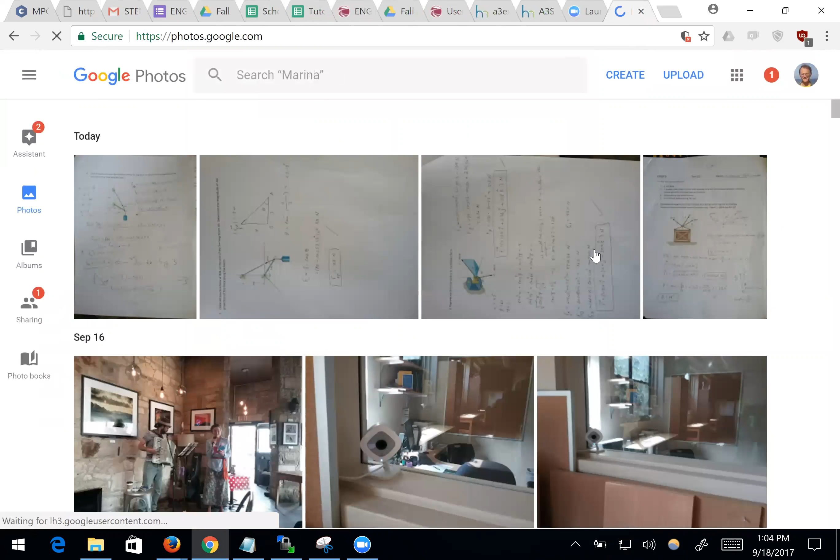So the test worked out pretty well for most people. I didn't actually make solutions yet, but I took photos of a few people's tests, so you can see them. I will post these later.

Does anybody want to go over anything in particular on the test? Yeah, on the test. Pardon me? Marking 3 points off for like a side note. Yeah, if you're doing something and you think it's wrong later on, just scratch it out.

Because when I see really crazy stuff, I want to mark that off. I just decided to do it this time because the test was actually fairly straightforward, and so I wanted to see how clear you were. When I'm looking at your work, especially if you didn't box what was the right answer, if you just had a bunch of random stuff on there and the right answer embedded in there somewhere, it's not up to me to find or determine which one's the right answer. When I see some crazy stuff there, I want to just mark it off because it looks really bad.

So I did see that you had the right answer, which was good, so I only marked off a few points for people. Some people did things like computed a force which was like 3 meters times g. I'm like, what? So I scratched it off and marked off points. You can't do that, right? You've done this, you know how forces work. It's not meters times g, right? That's not a force. So you should train yourself to think correctly and look for those errors.

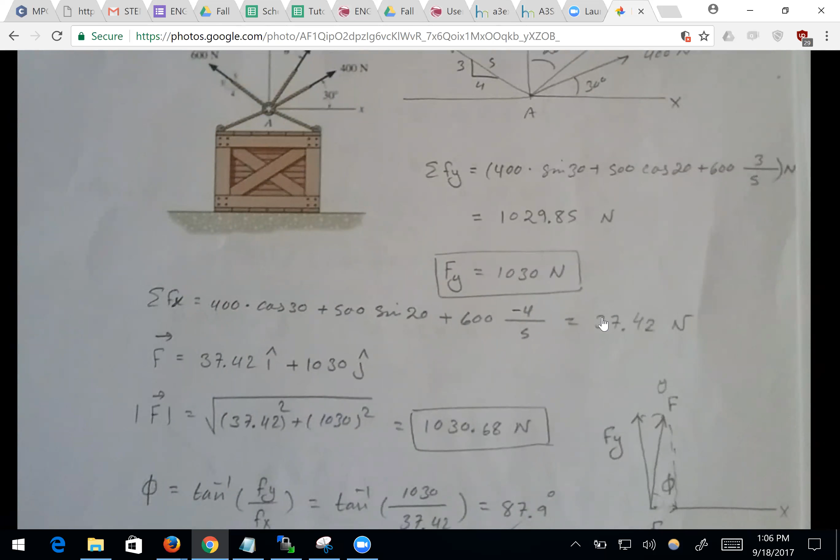Yeah, sure, so we can go over the second one. No, well, the last one I think is the most important. I was going to talk about that, but I'm happy to cover anything. If there's anything on these that anybody had questions about, let me know.

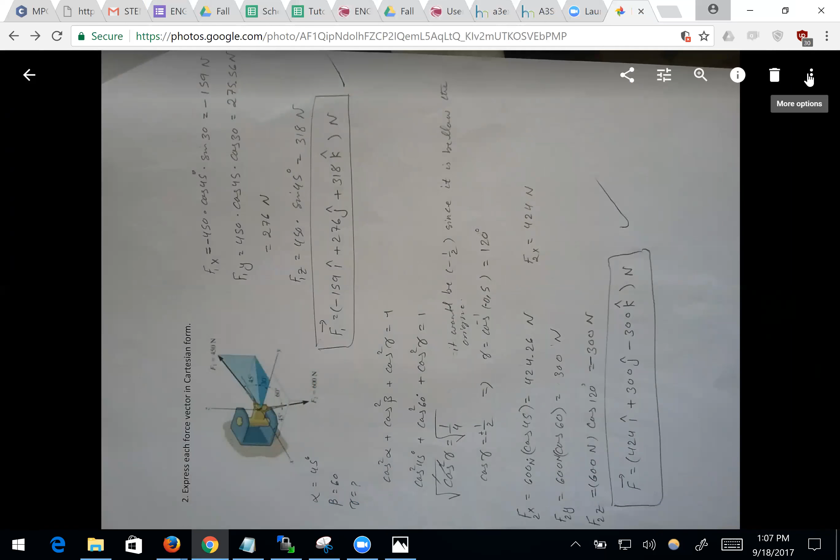And shoot, can I turn this? I don't know if I can. So turn your head sideways. The second one. What about the second one? Actually, should I download it? I could just download it, probably be better. Is there a rotate button? Even better. Perfect. It said rotate was Control R, but let's see. Try that again. Oh, Shift R.

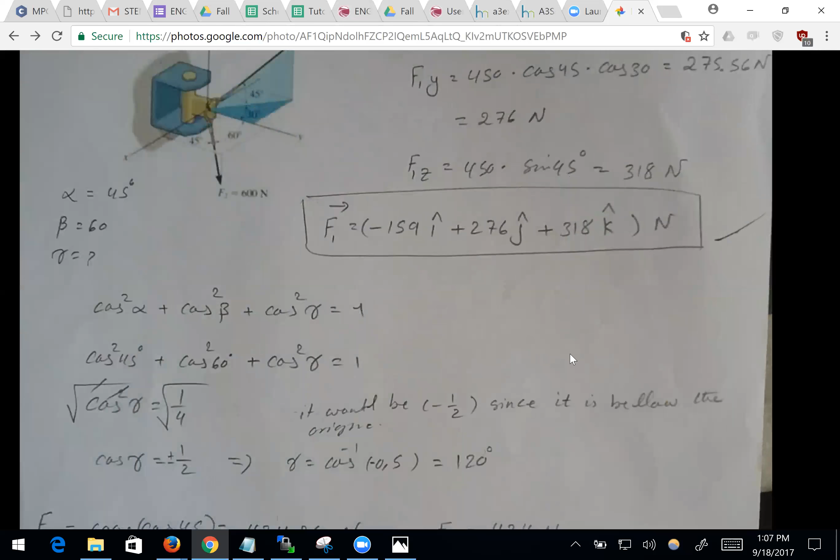Okay, so what are you doing on this one? So F1, right? That's a projection angle problem, right? So you got to figure out what's F prime, which is the base of that vertical triangle, right? That's 450 times the cosine of 45, right? Now you take that, and to find the x component...

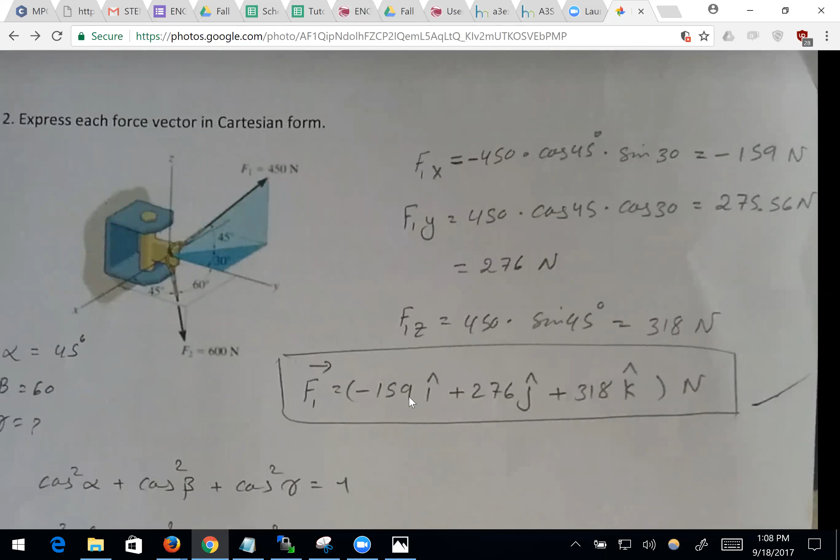I mean, I could still download it so we can mark it up if you want. Does anybody want to see me mark it up? The x component, which is... I wish I had time to actually get this together. So let me try downloading. Or even better, I could do a snipping tool. I think that would be easier.

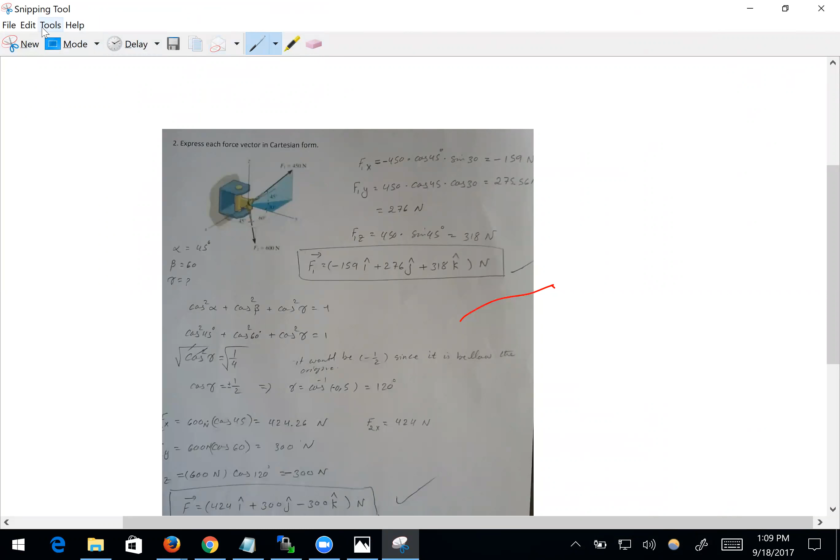So snipping tool. How do I make this thing bigger? All right, all these amazing tools, and they just don't do what you want them to do.

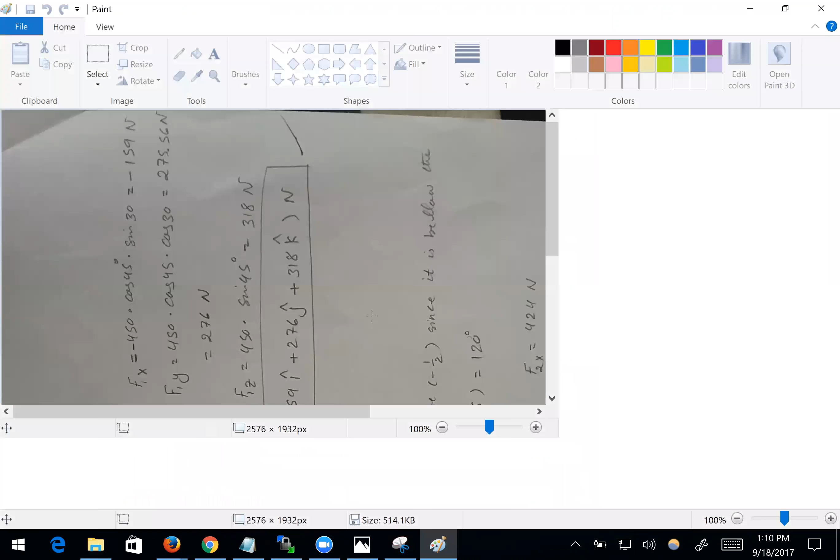Okay, let's do fine, sideways, open with... Paint, trusty paint. Okay, now I can mark this up.

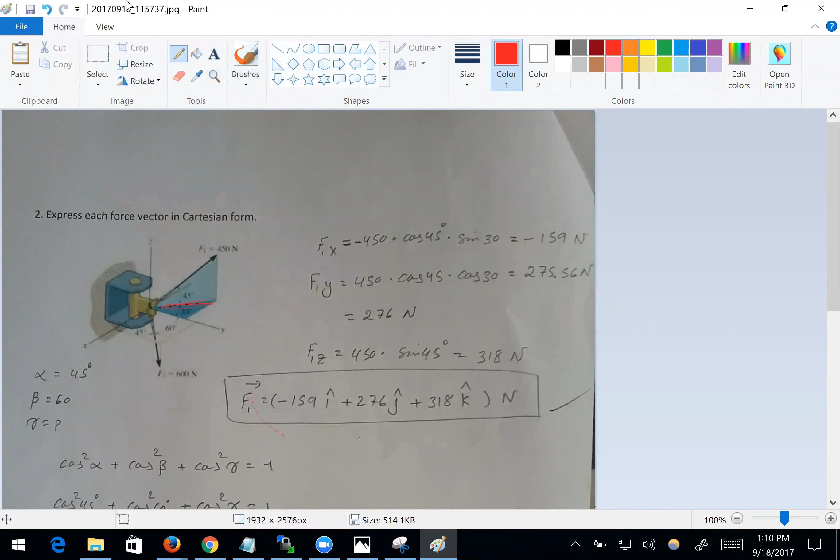As I was saying, the base of the triangle is that, and that has a length of 450 times the cosine of 45.

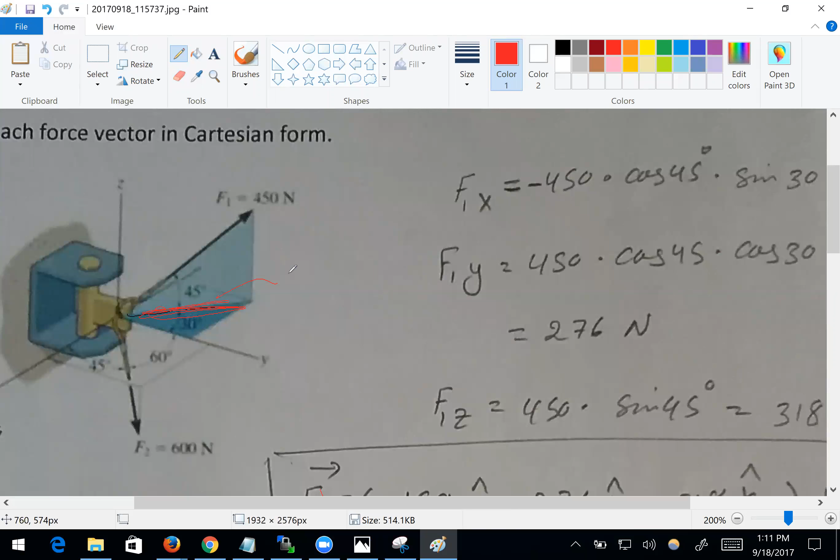Okay, and then what you do is you take that distance, and that's the hypotenuse of the flat triangle that's horizontal. You're going to use 450 cosine of 45, and use that as the hypotenuse of another triangle.

So to get the x component, this is going to be this times sine of 30, and it's negative. So that's why the fx is that, and fy is that. Was there a particular part, Isaac, that you wanted to go over on this one?

Not sure if you find x or find y first. If you want to bring it up here, I'll explain what my writing meant. It looks like I did the first half. Yeah, you got the first half right. You got F1 right? Yeah. Okay.

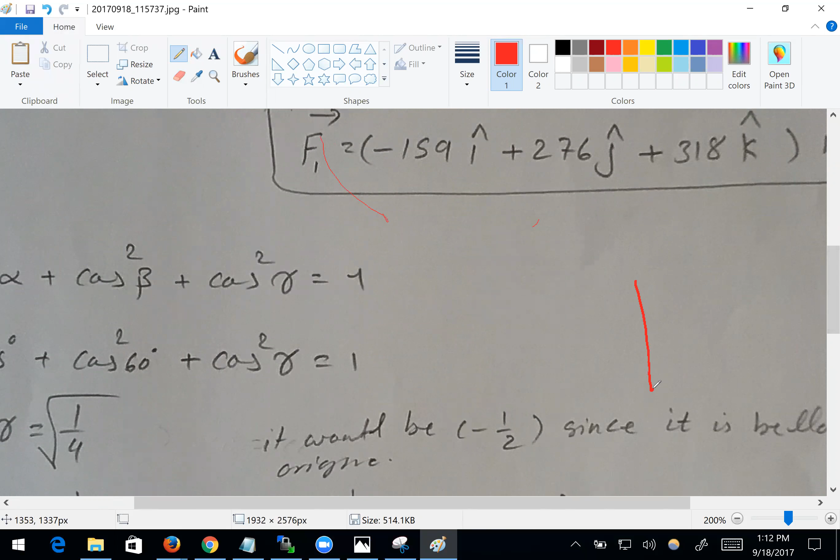And then for F2, no, find gamma. You didn't find gamma. Remember, gamma is when you have the other angle or the other vector. This is a direction angle problem, right? And for direction angles, you need alpha, beta, and gamma.

What's gamma? Angle to the z-axis, right? Gamma is this angle here. It's a little hard to see on this vector, but gamma would be the angle from the z-axis to the vector, and you have to find that in order to get this thing written properly. Remember, we did that.

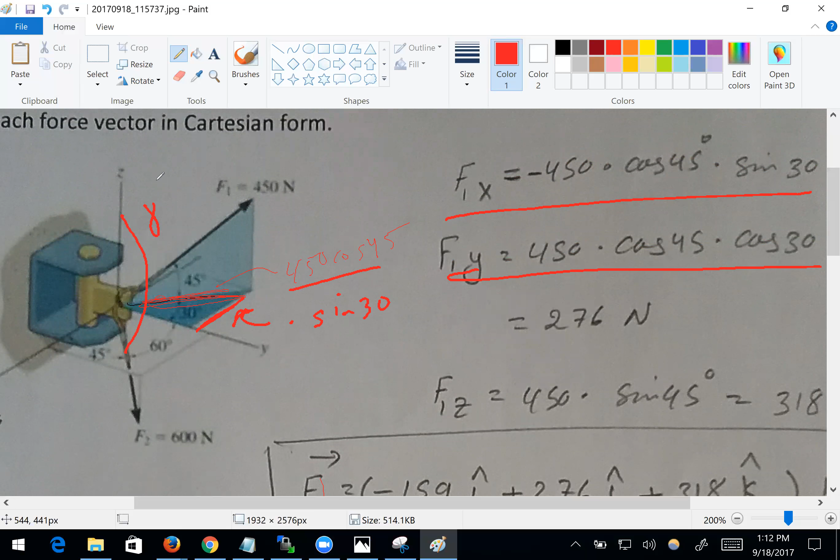So to find gamma, we were given alpha and beta. Some people said gamma is just 180 minus alpha minus beta. That's not right. No, good, glad you didn't write that.

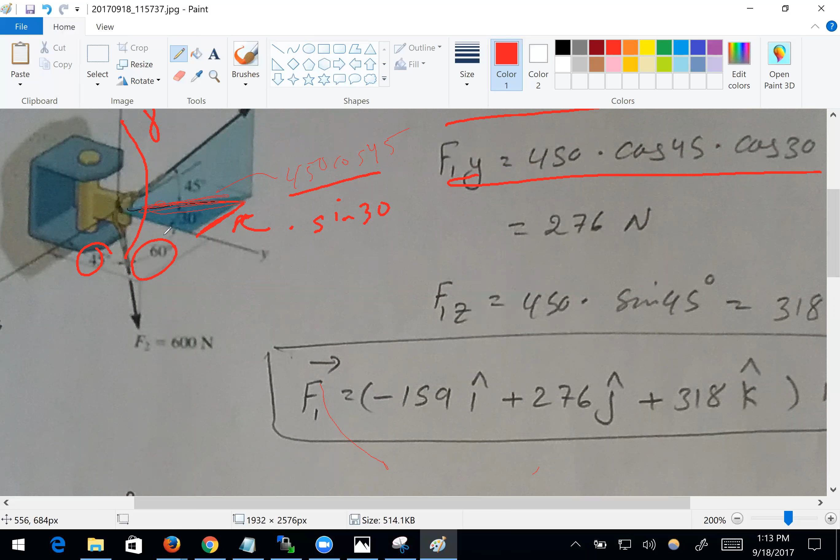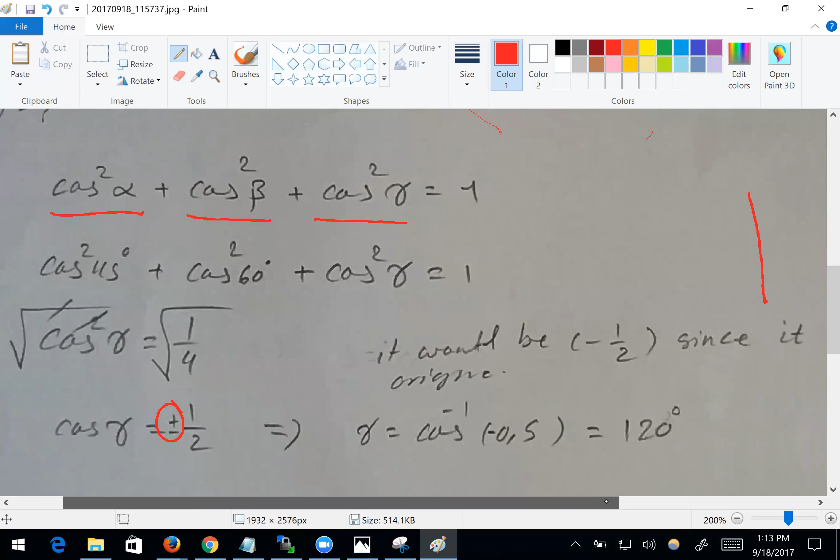Cosine squared alpha plus cosine squared beta plus cosine squared gamma equals 1. You solve that for gamma. That's how you find gamma. And there's two possible values for gamma, it could either be 60 or 120 degrees. In this case, since the arrow is clearly below the origin, pointing below the xy plane, gamma has to be 120 degrees so that the cosine is negative.

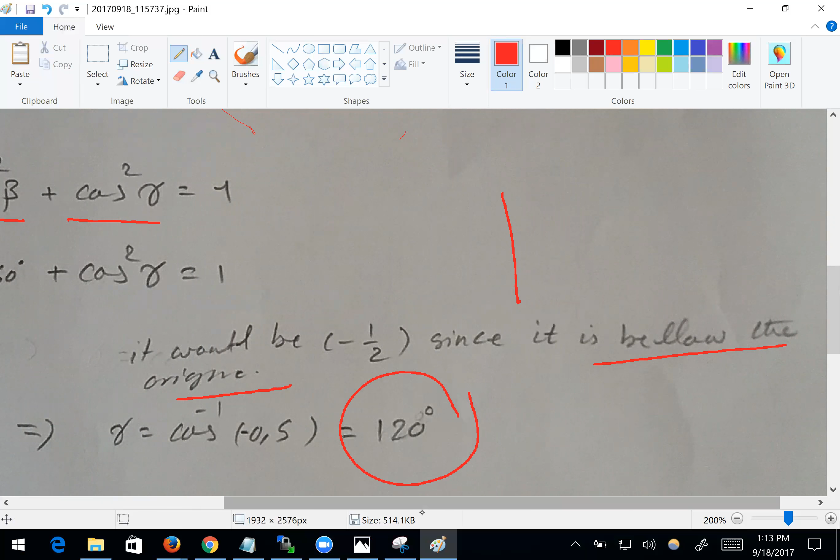Then once you find gamma, it's just plugging that into the third equation, 600 cosine of 120. This is gamma right there, this is beta, and this is alpha.

Question? I'm not sure each question. Each question was like 30, 30, 40, something like that. Basically it all adds up to 100, and I'm just sort of using some. It's not - I mean what I'm looking for is the kind of error that you're making. If it's a serious conceptual error, or if you just forgot to do a big part of it, like gamma is a pretty big chunk of points. Yeah, if it's a sign error, it could be 2 or 3 points depending on.

Yeah, because there's only 3 questions. Yeah. Yeah, there's only 3 questions. So, yeah.

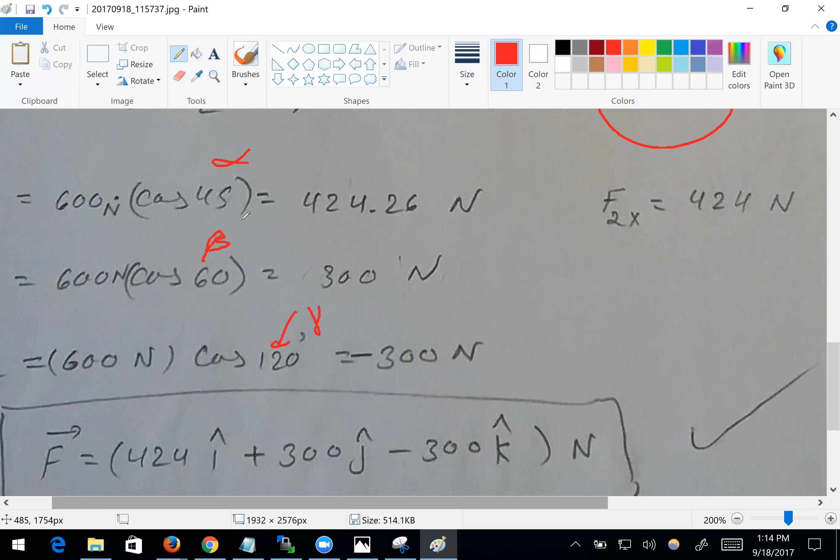Any other questions on that problem? Then the last one had an easy way of doing it. I won't even probably download this one. You just rotate it. Wait, how do we rotate again?

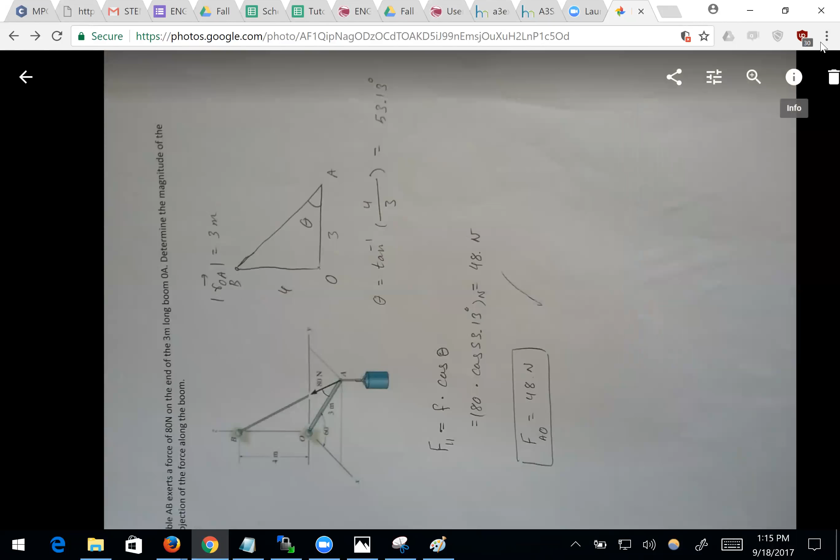Where was that? It's not under more tools. What was that rotating thing? All right, Shift R, try that. Thank you.

Okay, so this one, normally, I've given this kind of test before, and this third problem involves you actually having to use the dot product to find the answer. A lot of people just run aground there because they haven't figured that out clearly enough to be able to do that on a test.

This problem, in a section on dot product, is asking you for the projection of the force along the boom. But if you're clever enough and recognize this is a 3, 4, 5 triangle, you don't actually have to do the dot product to find the answer. You could just realize a 3, 4, 5 triangle means that theta is just 53.13 degrees. So the parallel component part that's going along AO is the projection of the 80 Newton onto the XY plane with a 53-degree angle there to the XY plane. So the cosine of that is 0.6, times 80 is 48 Newtons.

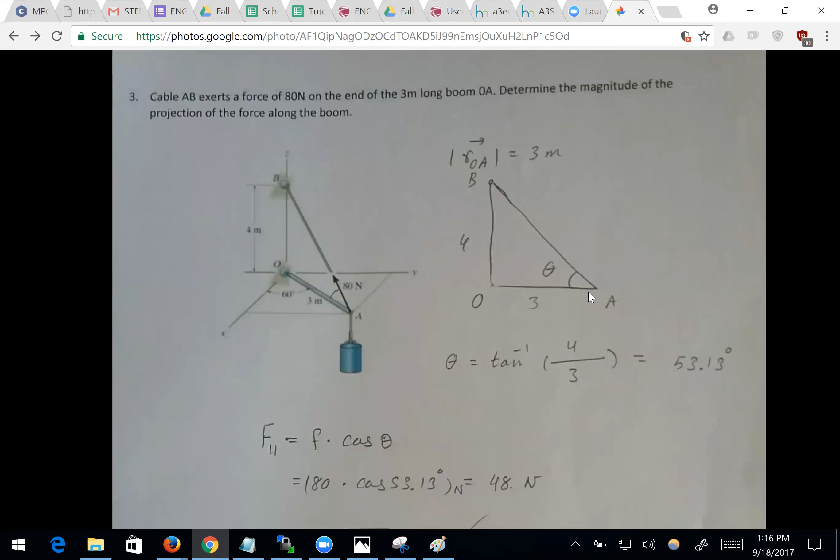So I accepted that, and that was an easy out for people who could see that. What I was hoping some people would do is the more general way, which can work even when you can't see that there's a 3, 4, 5 triangle, which in general you can't. So for that you have to use the dot product.

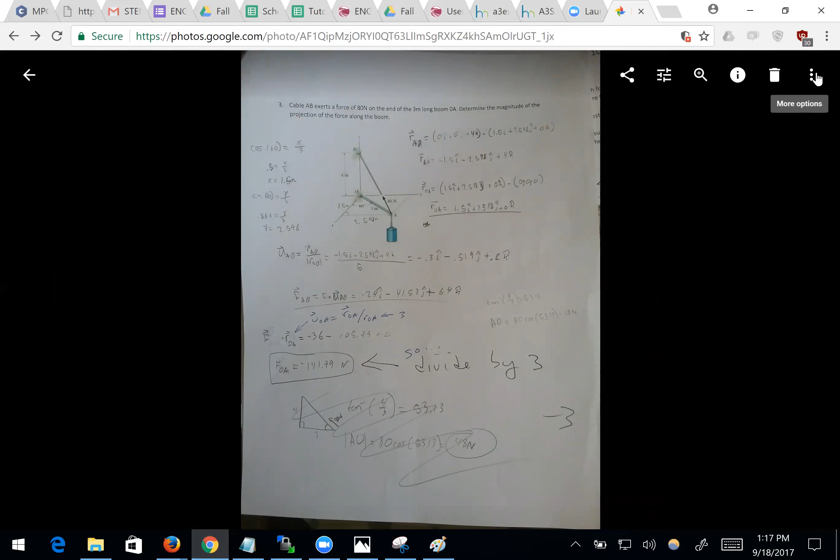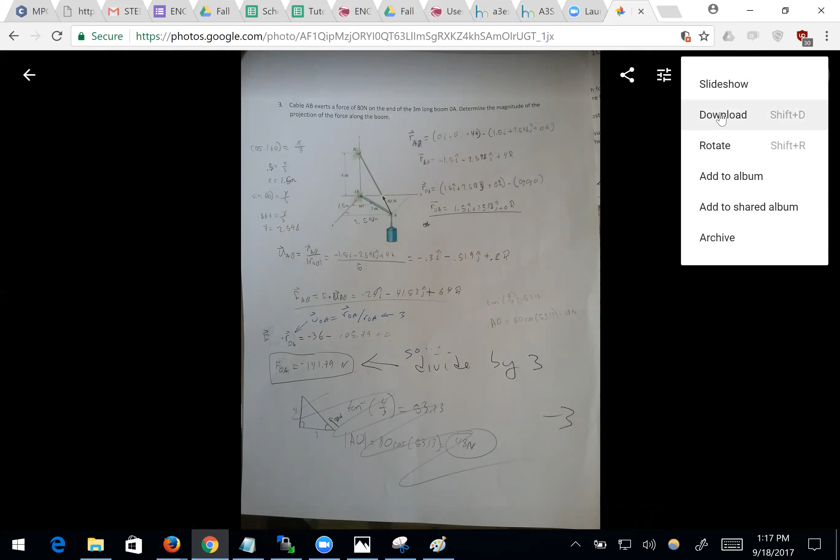So for the dot product solution, we have Jose's. Jose got it almost right, and actually a lot of people started using the dot product and then worked their way to figuring out what theta was just by the Pythagorean theorem or something, and then they bailed at that point. They didn't actually follow the dot product all the way through. Jose was one who actually did it all the way, but he forgot a little bit - he made a small error, and I can show you what that is real fast.

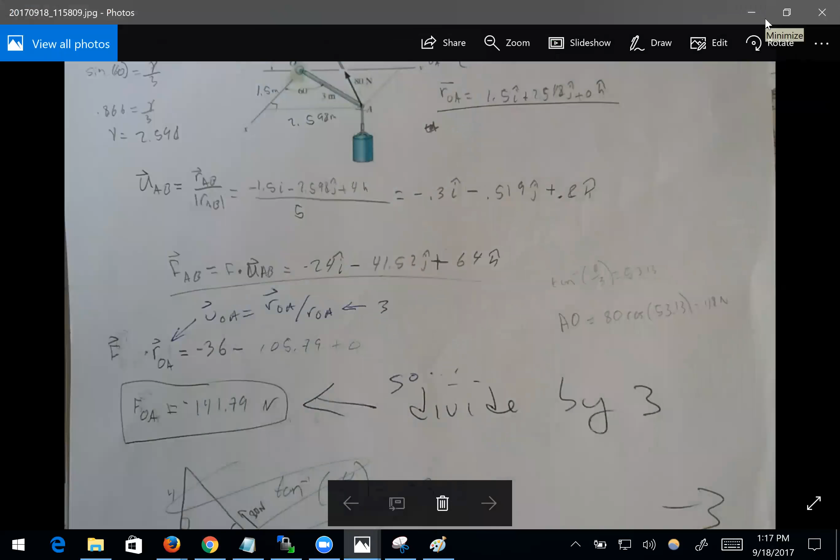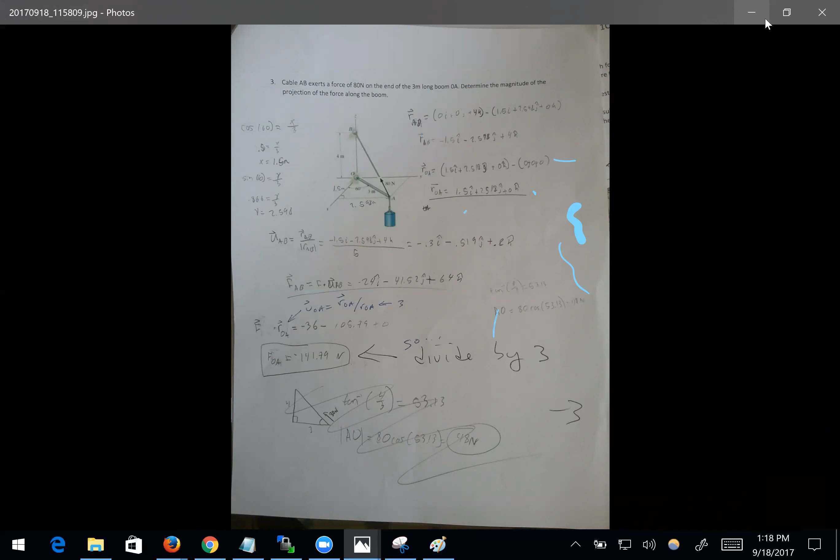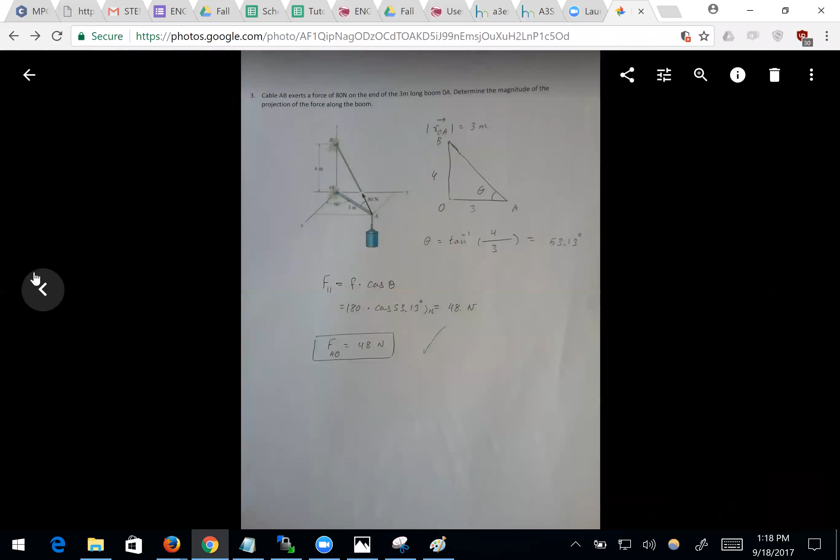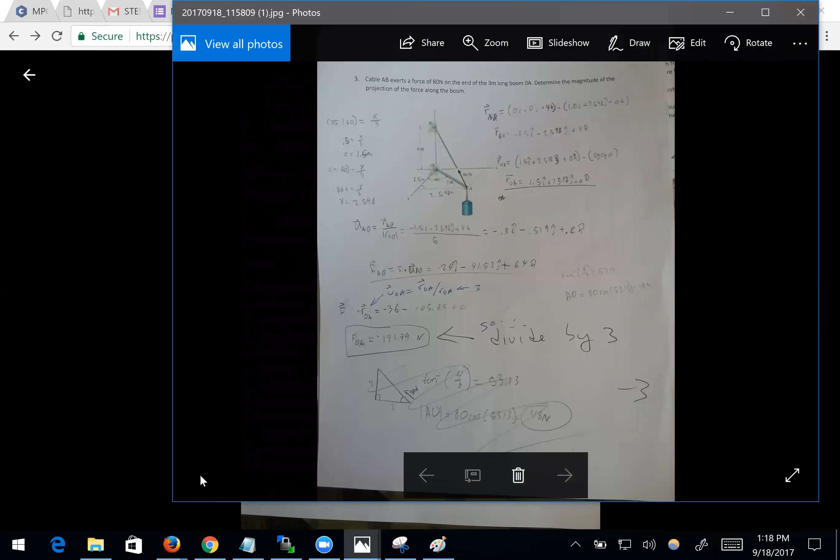Can I draw this thing? Oh, that's even better, I can blow it up. And draw on it, then I'm happy. That's what I draw on. Size, there we go. Okay. So now I want to - no, I don't like this after all. So it downloaded it, but is that it? It's not showing up here.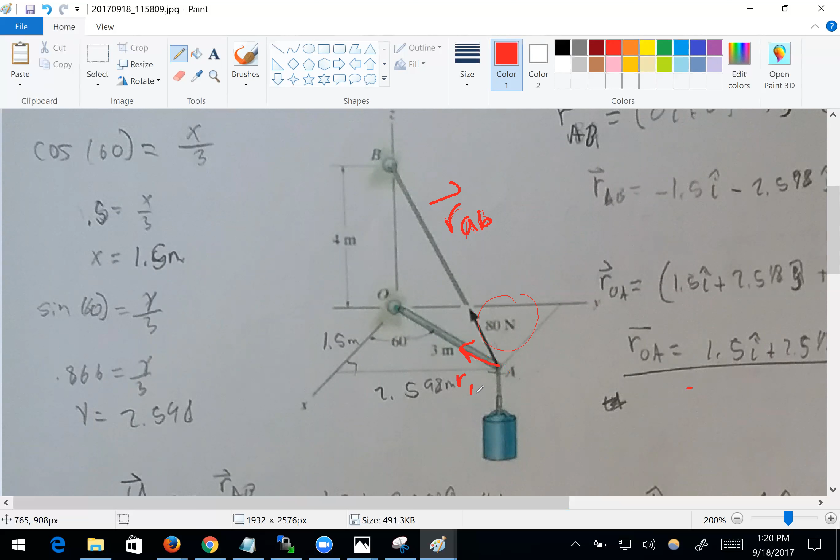You know that this is 80 newtons, so you've got to make a position vector to find the force. So you find RAB, which is this position vector, and you find UAB, which is a unit vector along that direction. You find RAO, which is this position vector, and you find the UAO.

And the formula for the dot product says that F parallel, and here's where Jose kind of worked it out here. The F parallel, or FOA, is going to equal the force vector dotted with—that's the dot—with not ROA, but UOA. Okay? Because remember the definition of the dot product is...

FOA dotted with UOA—you should remember this. This should have been on your formula sheet. It's what? This is F parallel to OA is FOA dotted with UOA, which is the magnitude of F—sorry, it's not FOA, it's FAB. The magnitude of FAB, which is the force going up that cable, times the magnitude of UOA.

What's the magnitude of UOA? What does U stand for? Unit vector. What's the magnitude of a unit vector? This is an easy answer. What's the magnitude of a unit vector?

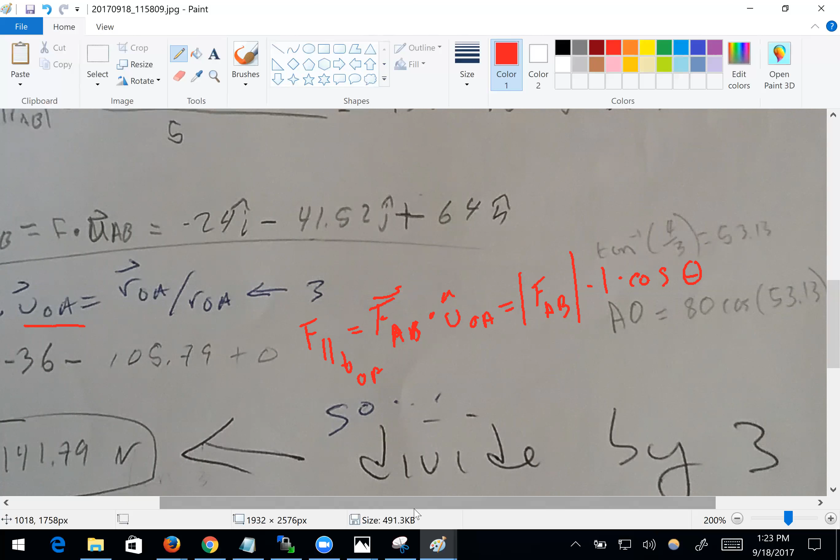Right here, you got FAB. So you got UAB there. You got ROA, which would have allowed him to calculate UOA. The magnitude of ROA is 3, so you just got to divide that by 3 to get UOA.

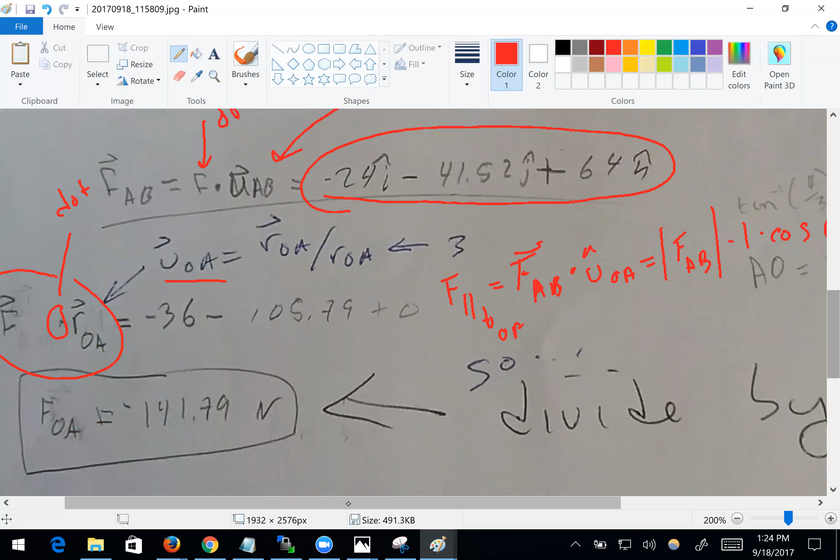Here is his FAB, which is 80 times UAB times that, which gives you the Cartesian form of the force vector. And then you have the parallel component, which is dotting that with UOA, not ROA. In other words, if you just divide it by 3, you'd get the right answer. So he was very close.

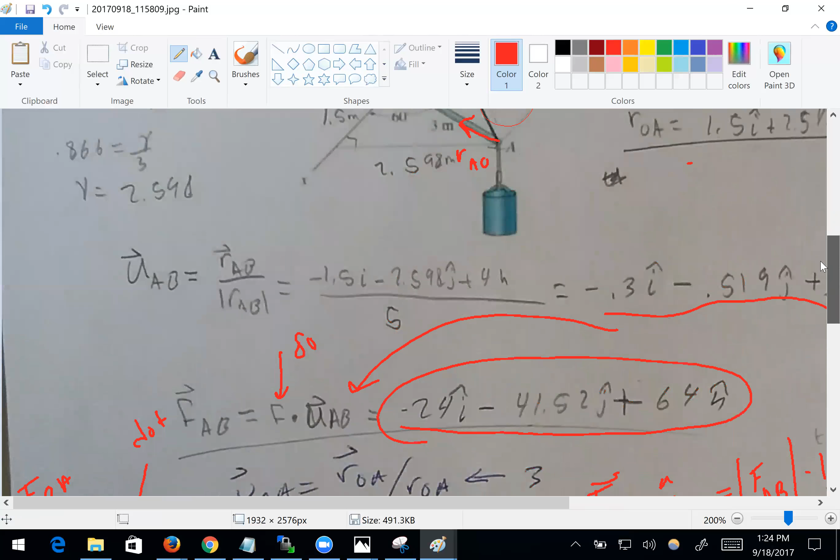Correct answer being, what was it, 48 or something? 48. Good. And actually, he had the right answer. Oh, he did it the easy way too, and then he scratched it out.

He took a gamble that the other way was right. I want you to decide - if you come up with 2 ways of finding the answer, you have to tell me which one you think is right. So for the not-easy method, you chose the dot product first.

Theta is still going to be the tangent inverse of 4/3. It's the same theta. The arctangent of 4/3 is theta.

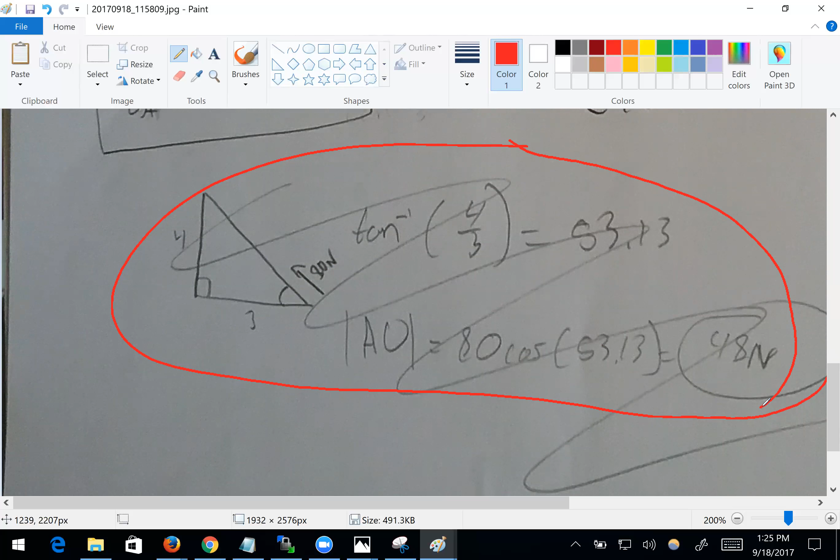It's the angle between the two vectors - it's this angle right here. Or, it could be defined depending on how you define OA. If you define it as AO, like pointing towards the origin, it's that. If you define it as going that way, it's this angle right here. It just gives you some sign issues.

So I will publish these so you can look at them more closely. But that's kind of what I was looking for in general. If you have the clarity to see the easy way, I'll give you guys full credit for that.

That made it a really easy test, because that means you didn't have to do the position vector, the unit vector, or the dot product - you just have to know all those things and see it, right? You got away with it. That's why it was kind of an easier test than normal. That's why I said I'm going to start looking at crazy stuff and marking people off for it if they didn't actually eliminate it.

So does that mean the next test you won't grade as harshly? As in, next test I won't grade as harshly, but the next test you can expect to be harder. Do you think that's harsh? I mean, 3 points is not a huge deal when you do something crazy, as long as you don't make a habit of it.

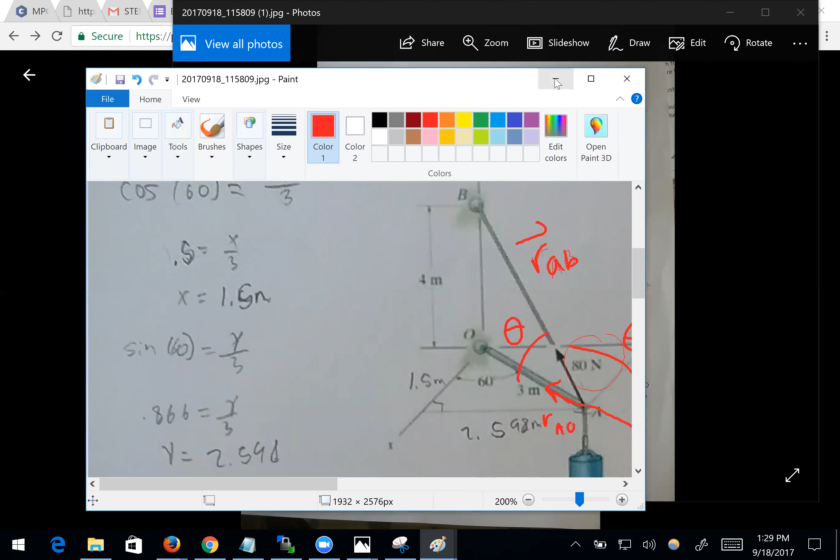I was going to ask if anybody wanted to ask a question about homework 3, or homework 4. Homework 4 is probably fresh in your mind, but we didn't go over homework 3 yet. I have solutions if anybody wants to do that, or I could go over a solution approach. Then the plan for today was, after taking questions, to give you an overview of this week's topics - I've already posted the lecture videos for those.

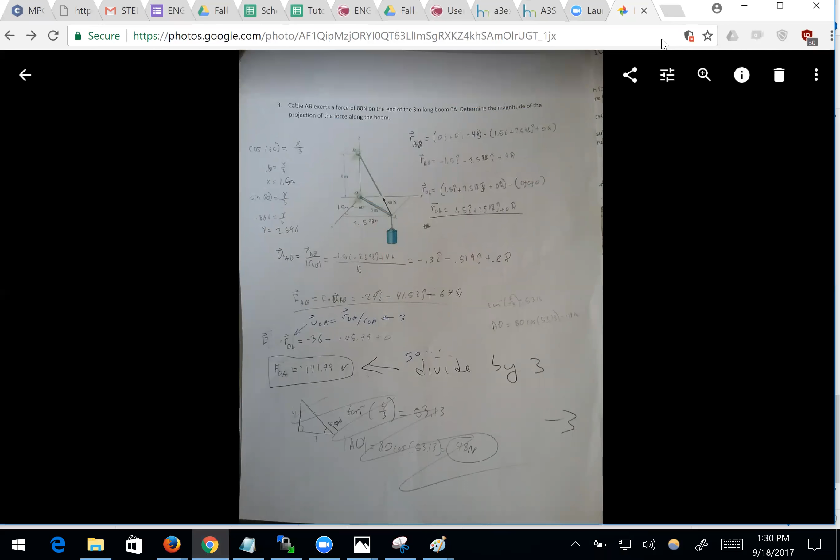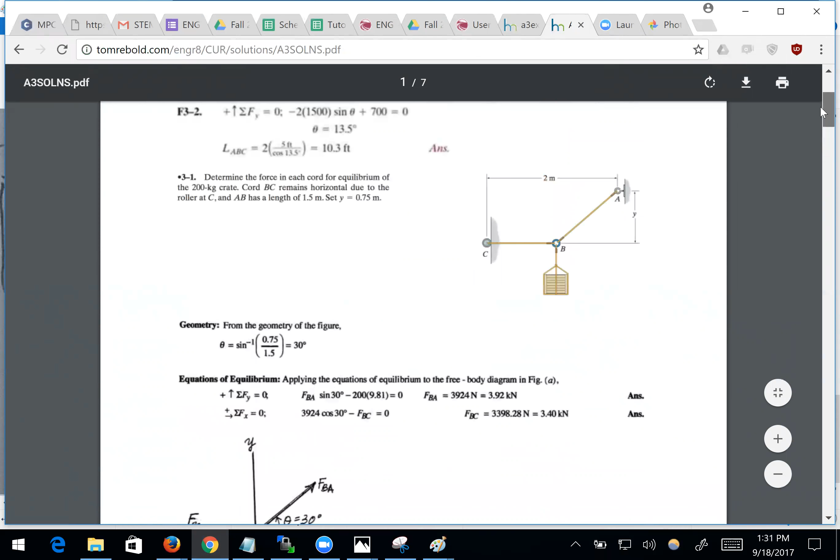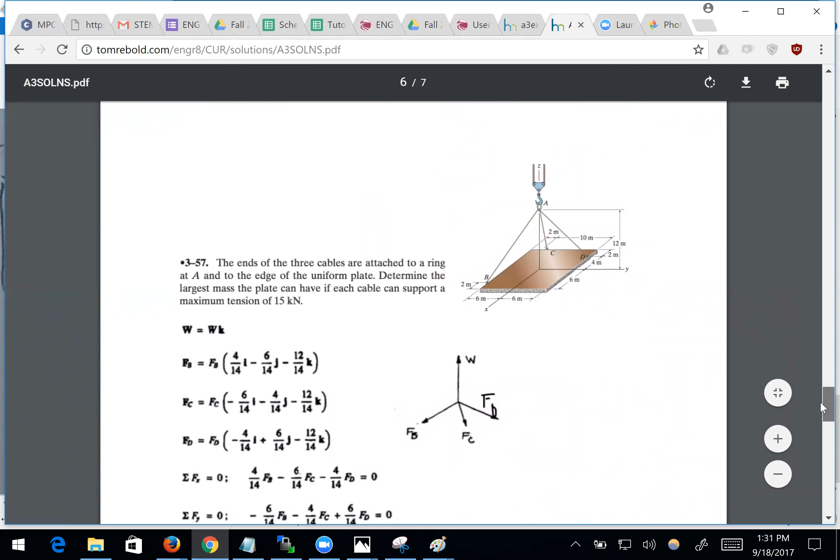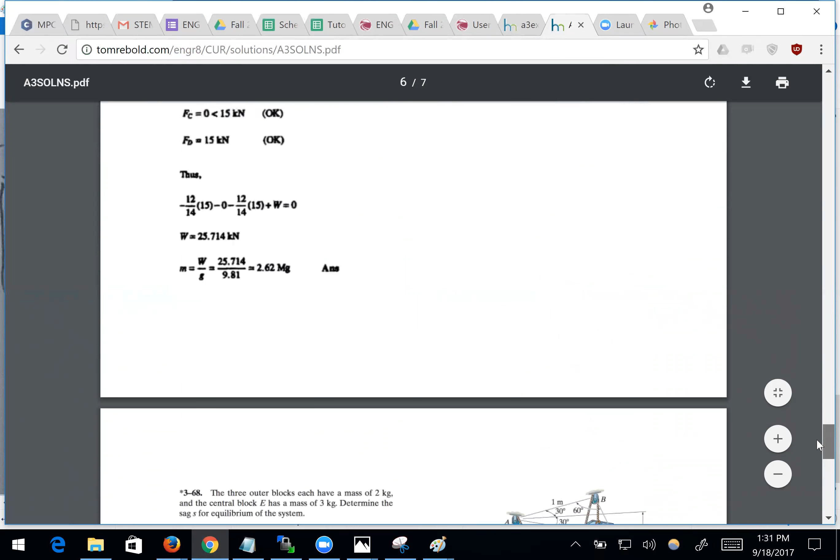So homework 3, let me see—these are the solutions to homework 3. Does that look familiar? There was that problem, this problem, these guys—remember that one? Any questions on any of these? Remember that one—the maximum tension problem, that crazy one. The last one? Sure.

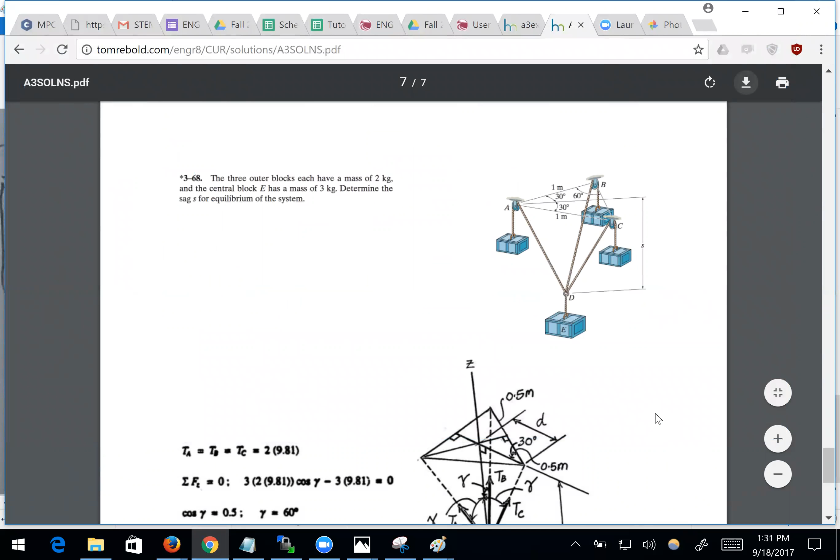As far as the test goes, I don't mind if you're trying stuff out and you're not sure about it, but at the end you should look at your work, and if there are parts where you were drifting off or something, you can just X those out—they don't pertain to your main solution. You can X those out and I won't make you lose any points for doing that. Just realize someone's going to be reading this, and they're going to be confused if you have confusing stuff on there.

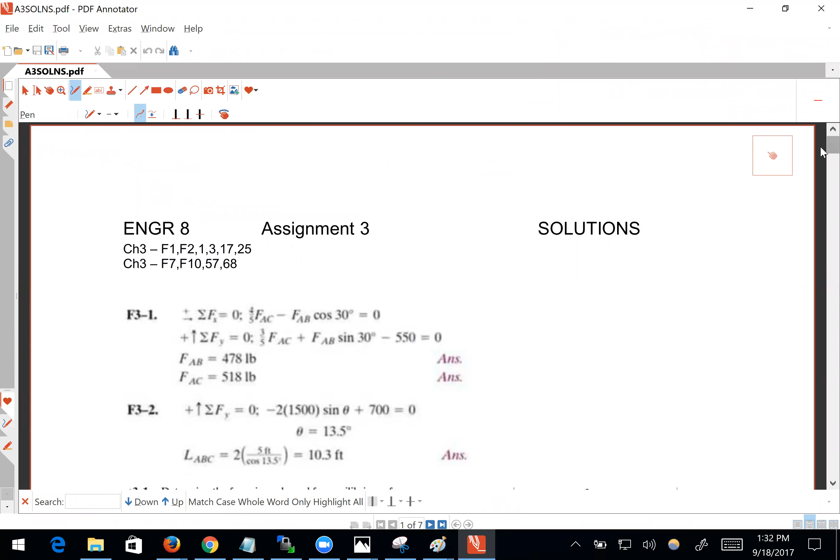So the question was on the last problem, which is really a cool problem. Conceptually, what's happening is this central mass, which is 3 kilograms, is being perfectly balanced by these 3 side masses hanging off in a sort of tetrahedron shape. There's a geometry thing involved, so you can see there's a tetrahedron, and you're trying to find the balancing point—how far is that thing going to sag before all 3 forces balance?

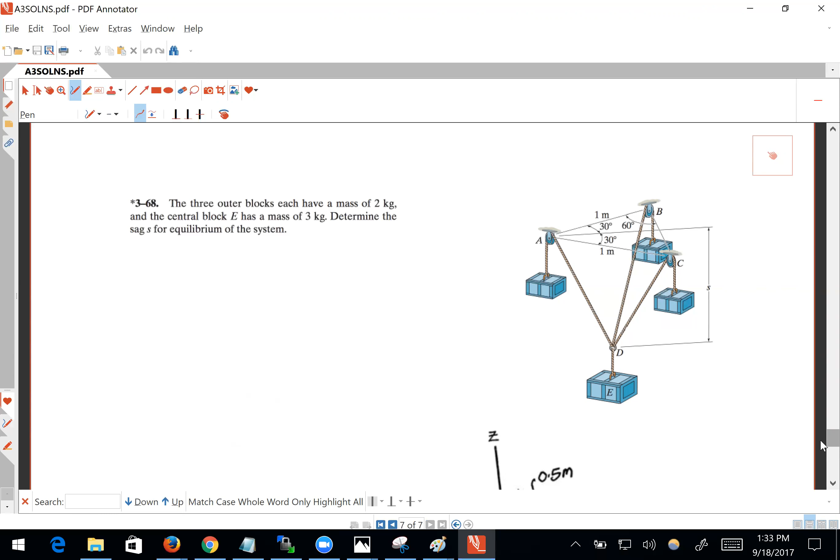You can do a thought experiment thinking about what's going on with these forces, and you can see it if you draw the free body diagram like so. You've got TA, TB, TC. Now the magnitude of TA, TB, TC is what? The weight of these guys—the weight is 2 kilograms times G, so a little less than 20. That's these guys, right?

So the magnitude of those things is known, but what you don't know is the angle to the vertical—this angle, they're calling it gamma, which sort of makes sense. The angle to the vertical for each one of those is the important angle, because that determines how much of TC is actually lifting up the box. You can see that if the cables were really long, so the angle gamma was 0, you would actually have 3 times those TCs to lift up that central mass.

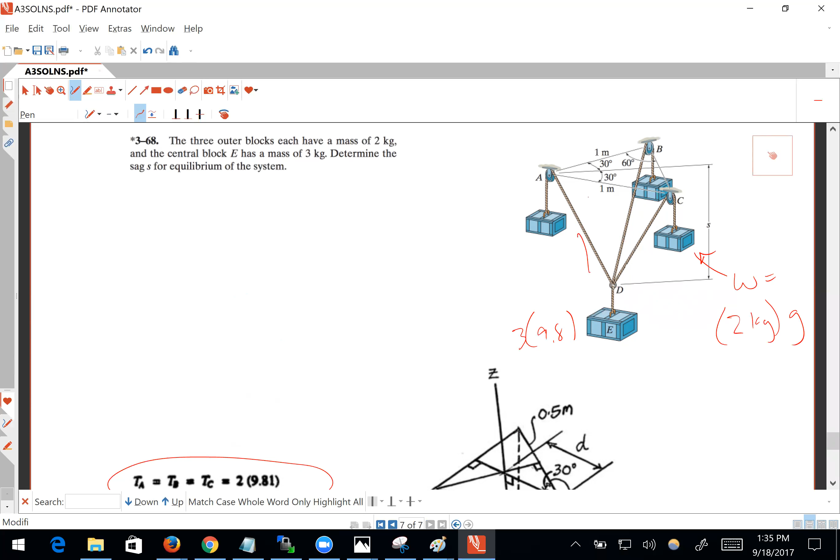But the central mass is not 3 times the mass of the ones on the outside—it's only 1.5 times those masses. This is 3 times 9.8. You potentially could have 2, 4, 6 times 9.8 if they were all vertical going up, which is twice as much as you need. So there's going to be a point where it balances—if S gets too small, those weights aren't going to be heavy enough to pull it further; if S gets too long, those weights are going to be too light.

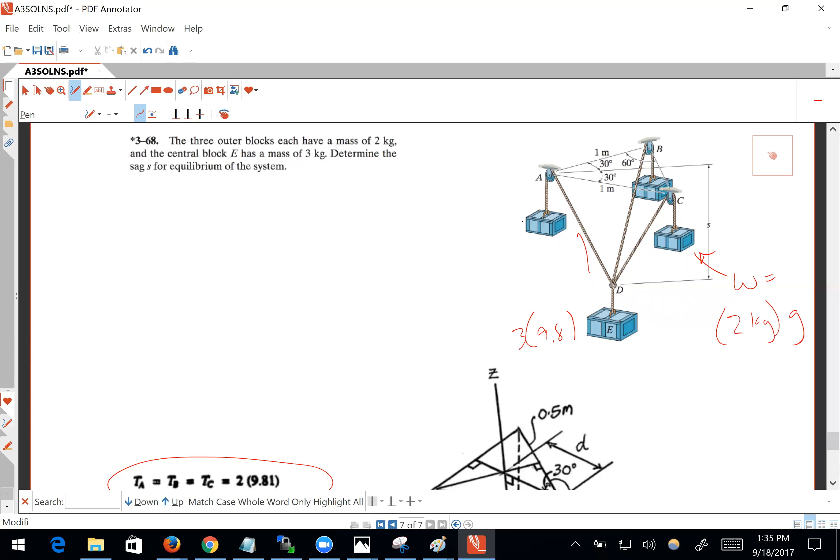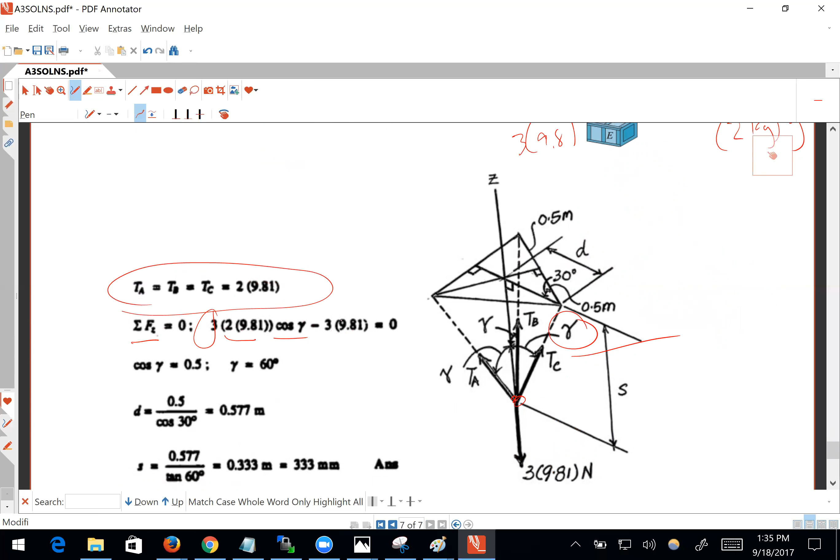So we're trying to find what is the S for balance, for equilibrium, and you propose that there's a gamma here. If you just add the Z components together—you've got 3 masses times the weight, or times the mass, 3 of these times the mass times G, that's the total weight times the cosine of gamma, is the total vertical force. The downward force is just this guy times 9.81, the weight of the big guy, and then these are the 3 small guys, scaled by cosine of gamma.

That equals 0. Now you can solve that pretty easily and find that gamma is going to be 60 degrees. It might not be too hard to get to that point, but then the question is, you've got to turn that into a distance, a position distance. So you've got to go from these forces to some kind of distance, and that's where the geometry is involved. They make it look so easy here, and you can sort of see it from the picture.

It's a pretty nicely drawn picture. It's got a lot of information in there, but you can see that this is an equilateral triangle with 1 meter on each side, right?

And you can then say, well, you can bisect each of those angles where the center point is, and then you've got basically 0.5 meters on a right triangle, and this becomes like a 1, 2, √3 triangle or whatever. So this is 1, this is 1/2, and then this distance here is going to be √3/2.

And what we're trying to find is, if we know that this angle here is, let's do a vertical slice here, 60 degrees, and if we happen to know what this distance d is, then we could figure out, using our trig, what S is.

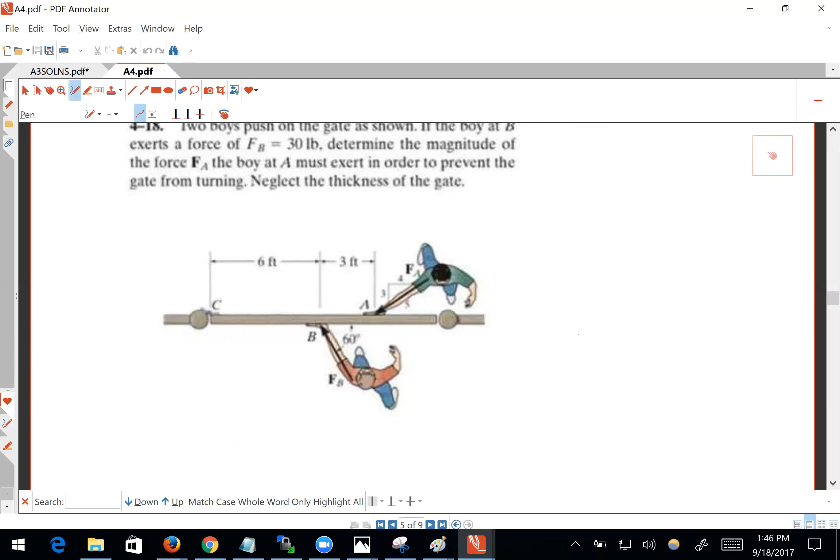But anyway, looking at this problem, what is the issue here, right? You've got to find the balancing of the moments that each force is providing around the hinge of that gate. The hinge of the gate is where? It's at C, right? So we need to know that, and of course, if you break the forces up into the y and x components...

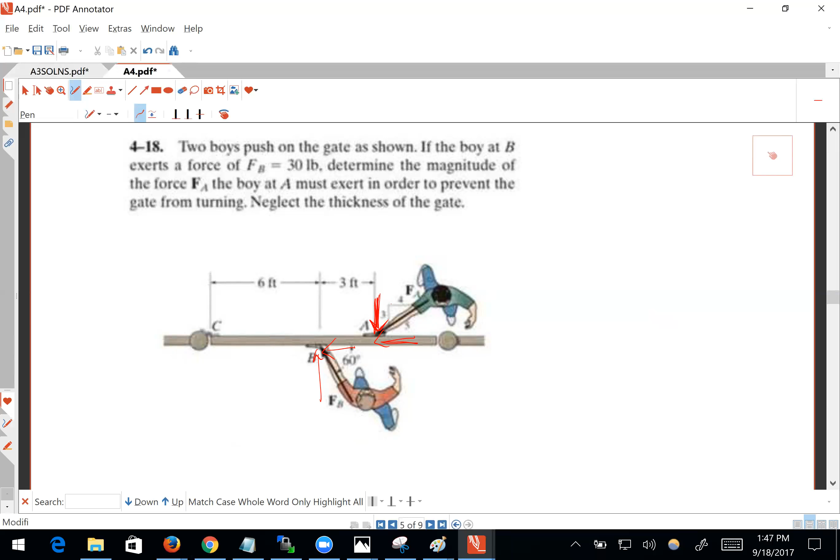You're going to have something that looks like this. Now, are the x components going to matter in terms of balancing out the moments? Which component really matters? The y components matter, because the x components are pointing right at the hinge, so they don't provide a moment either way. So it's really FAY and FBY that matters, right?

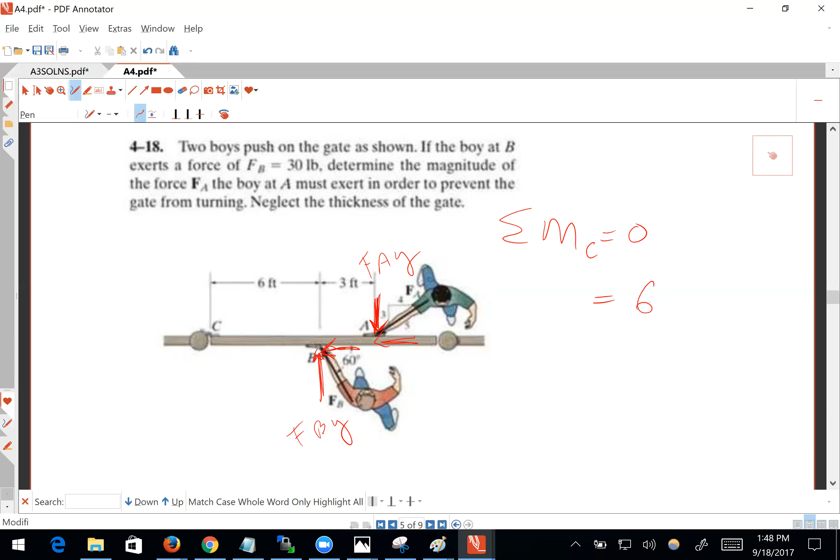And the sum of the moments at C has to be 0. If I was going to write those out, how would I write the sum of the moments at C with those two forces, FAY and FBY? I got 6 times FBY, which is going plus or minus — it's trying to make it go that way, and we'll call that the plus direction, right? And I've got something times FAY. What's the moment arm for FAY? 9. So minus 9 FAY. Well, that has to equal 0.

Okay, and doing that, since you know that FB is 30 pounds, you can find out what FBY is. And then you can find out what FAY is, and you can figure out what FA is from the angles. Yeah, that's the plan, right?

Once you see the plan, then it's like, oh yeah, that's pretty easy. So if you just did that on our problem session days, that might be sufficient to get you through the homework a lot faster. Hit them all, get a plan of attack for them all. Yeah, then all I gotta do is work it out. So we could try that this week.

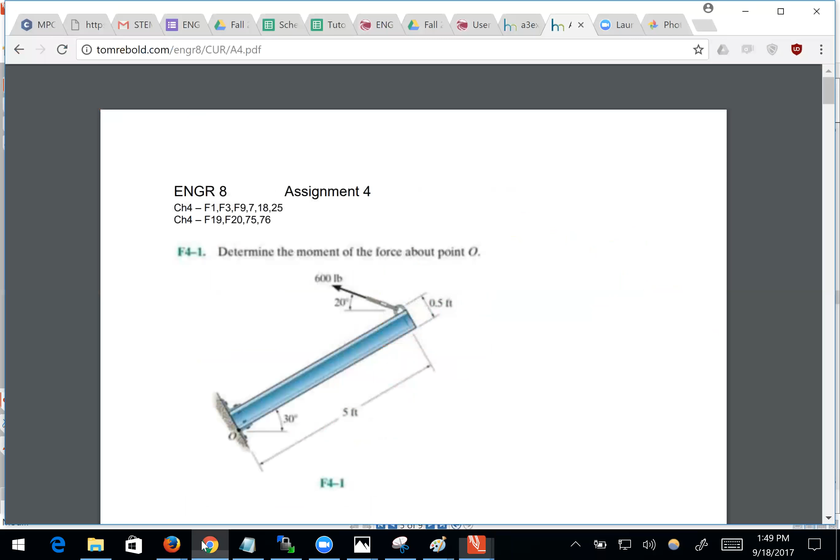Well, we are rapidly running out of time here, and I wanted to just talk briefly about the topics for today. This week we're going to be doing moments in 3 dimensions, and also finding a moment along an axis.

I kind of thought this might be, rather than flipping through the slides which you're going to get in the lecture, we can maybe just look at the problem handouts that I just gave to you guys, which is what you're going to be solving here.

Now we start reviewing moments in 2 dimensions, which is what we did in homework 4, just to ground you. A moment in 2 dimensions is just the force times the distance. The distance is the perpendicular distance from the line of action of the force to the axis that you're finding the moment about. In terms of the moment, it looks like a scalar, but there is a sign involved.

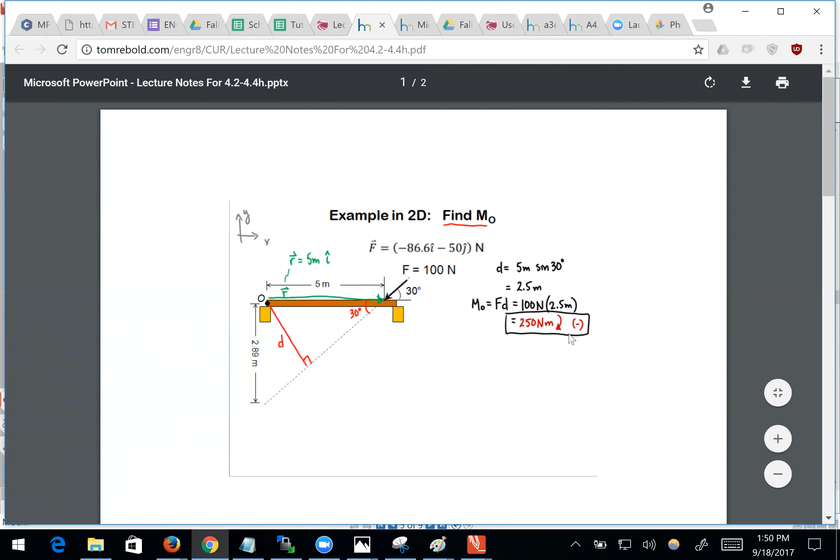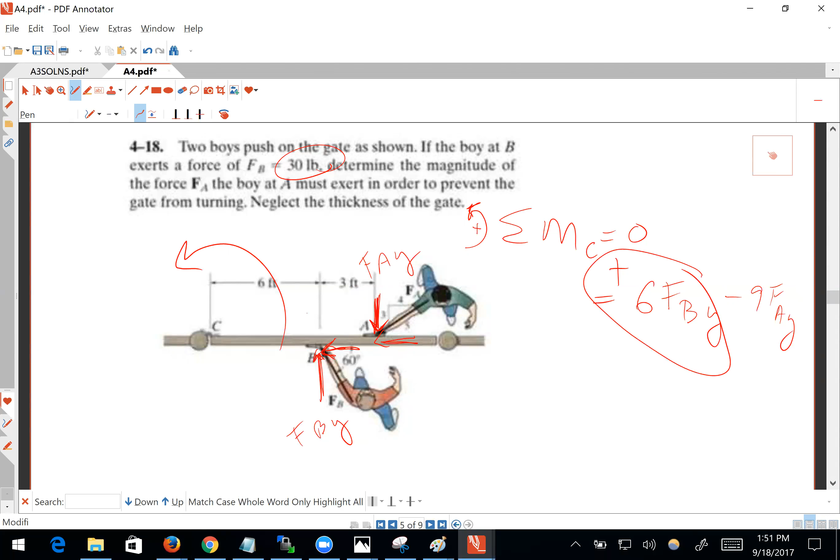We use these curved arrows to indicate what our sense is for that moment. I was just thinking about this on assignment 4. What engineers often do when doing a 2-dimensional moment is they'll indicate on their equations what they're considering as a positive moment direction in 2 dimensions. Counterclockwise is positive. That allows me, and you, to see if that's correct. Is the moment of FBY going counterclockwise? Okay, but that's just a 2-dimensional situation, because in general, moments are actually vectors.

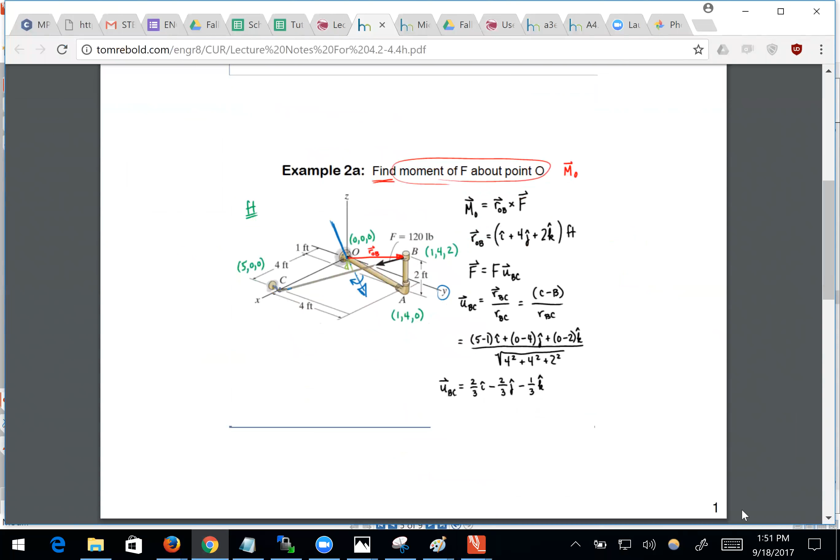And in 3 dimensions, you've got to do a cross product. So the actual moment definition is the cross product of a position vector to the axis, or to the point, that you're doing it on. This is a moment about a point, point O, crossed with the force vector F.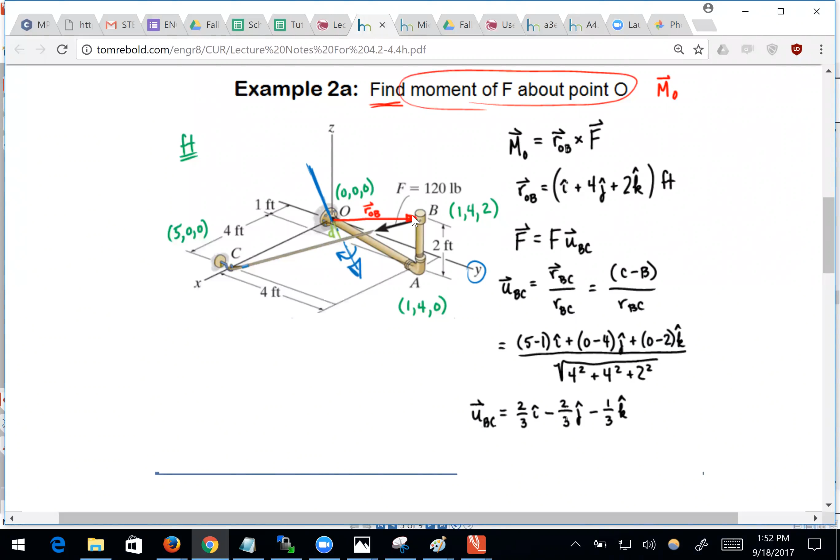And the cross product is defined as the product of the magnitudes times the sine of the angle between them, isn't it? So it's a perpendicular kind of thing. When the angle's 90 degrees, that's when you get the biggest cross product, and the smallest dot product. So you can see what's involved here.

You've got to find a position vector, ROB, which is the vector connecting point O to the force line. However, you have this flexibility because you could also use OC. ROB could just be any position vector connecting the point of the moment to the line of action of the force. And that's what you're going to be looking at today.

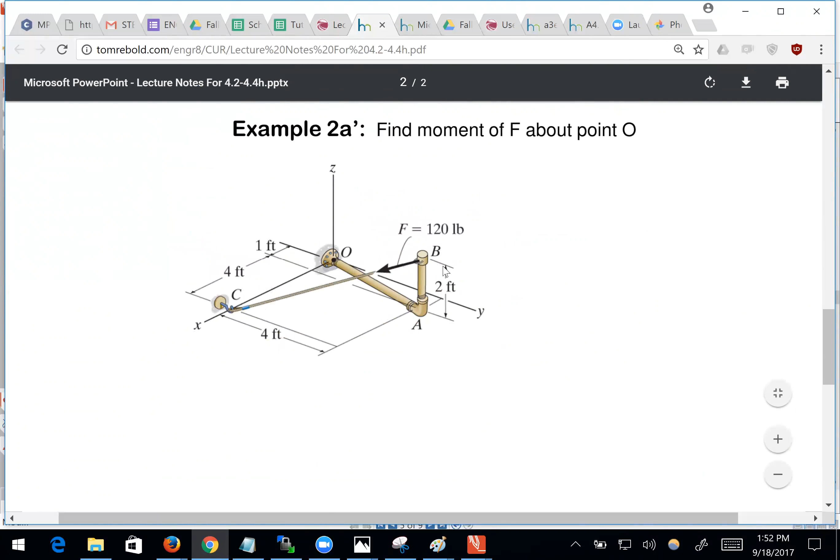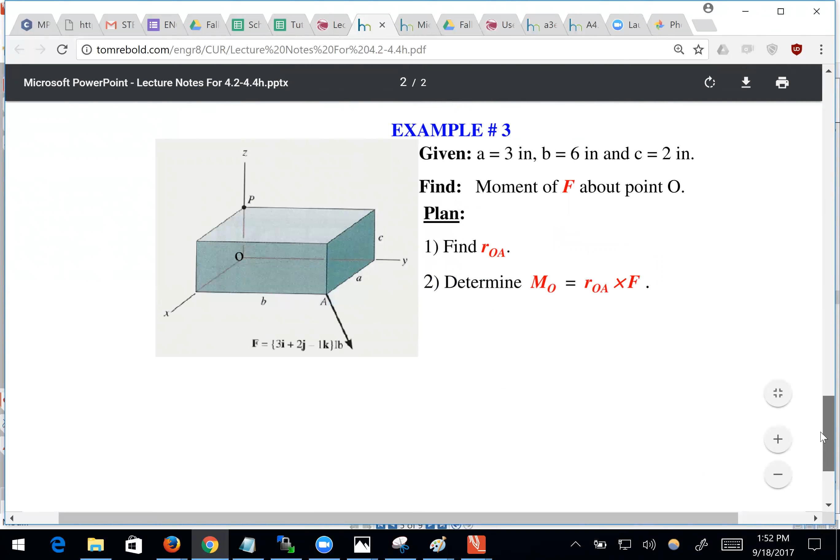You can see it gets quite a bit more complicated. This is showing you how to find the moment of F about O. In this example, you're going to be using OC as your position vector. ROC crossed with F is going to give you the same answer as ROB crossed with F. And that's what you're going to actually work out. Then in another example, you'll find ROA cross F, doing these cross products.

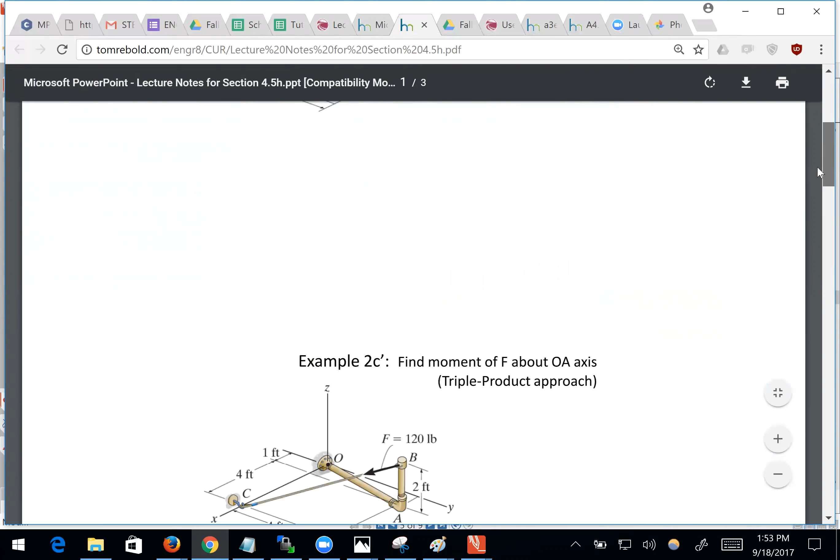And then in the second one, you're going to find the moment about the OA axis. I might have actually given you the wrong handout for the second one, which is unfortunate. I did. So if you want to just hang out for a second, I will launch the correct one to the printer. That one I gave you, I think it's from last week.

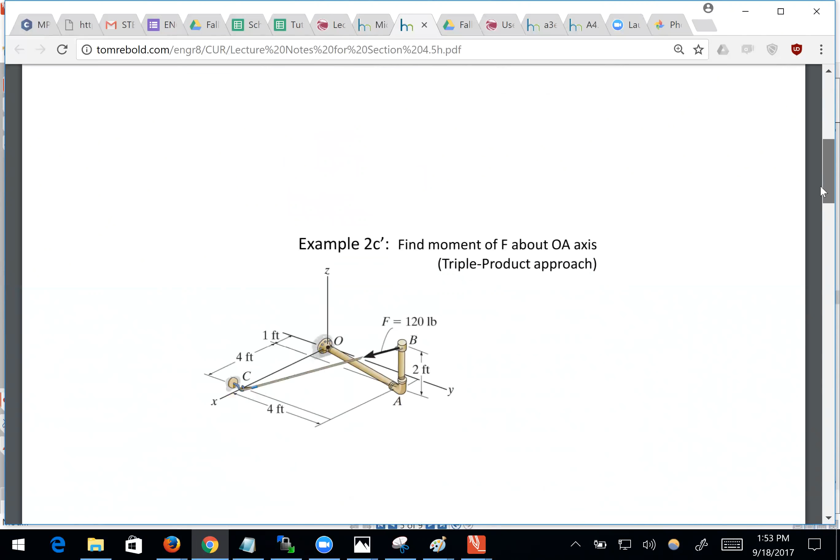Because the interesting thing, going to the moment about an axis now, is where you maybe want to find the moment about the OA axis. You want to know how much that force is contributing to a rotation trying to get that pipe to spin about its axis, OA. And that involves what's called the triple product. You've got to do a dot product with the axis vector at the very end of the calculation.

And I think you've got this in 20C, right? The triple product, they call it. We call it the triple scalar product or the triple product. You get that, you can do that. So it's actually kind of nice, it's an application of the triple product. You're going to see how that actually works.

But let me, you can just chill for a second. That is the plan.

I got the wrong one. There are 5 of you. That's what I'm printing.